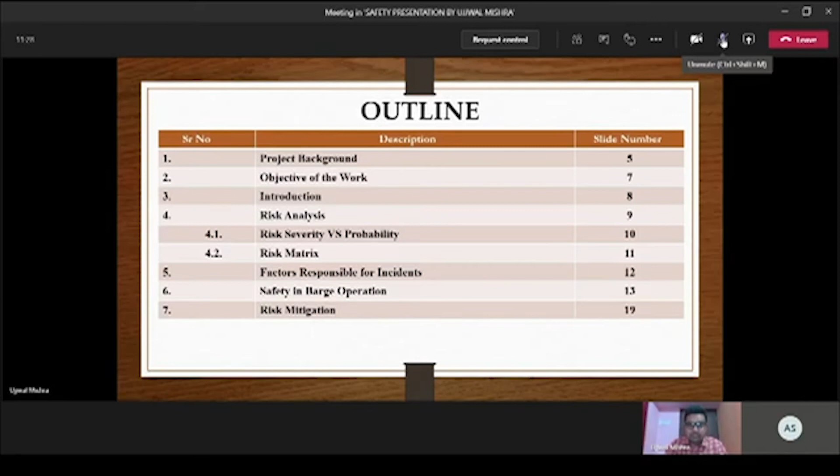Many of us have confusion regarding what is a port and what is a harbor. I have drawn a basic difference here. As you can see in the presentation, there are various comparison metrics that I have taken, and I have compared port and harbor so that it becomes easy for a normal person or the public to understand the differences.

If you take the meaning, port refers to an arrangement where boats and ships moor and transfer passengers and cargo to and from land. But harbor alludes to an area next to the shore where watercrafts are anchored to get safety from stormy weather. So what is it exactly? Port is a place for docking, traffic and storage of boats. Harbor is a place for storing boats.

When we come to the construction part, ports are always man-made, but harbor can be a man-made structure or a natural harbor. Ports are used for trading of goods and cargoes between countries. Harbor is used for seeking shelter from bad weather, and for vessels to be safely stored. Onshore facilities are available in port construction, but in harbor it may or may not be available.

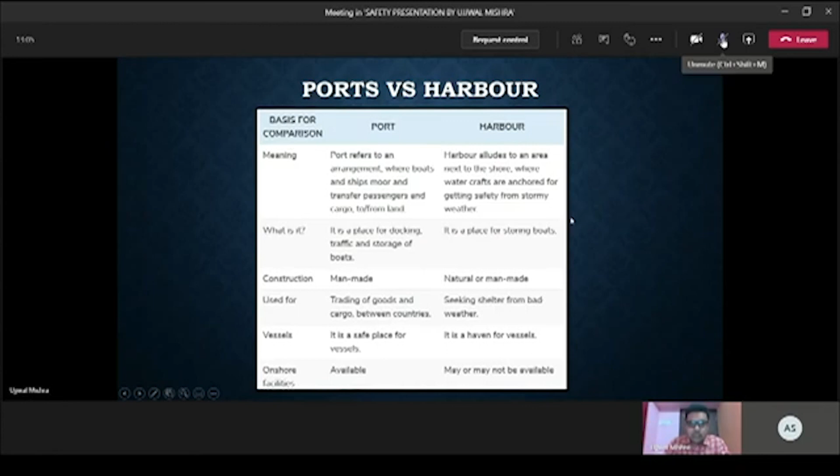Moving on with the presentation, we'll start with the project background. The case study that I've taken is from a port construction site. Port construction basically includes the following things to be done: sand filling on water, piling activities, superstructure work and revetment works.

What is sand filling on water? This is basically done to prepare the working platform so that most of the works can be done in a land mode of construction, and it becomes easy to construct anything on land as compared to water. Piling activities you might have read or heard about, and superstructure work also you might have read or heard about.

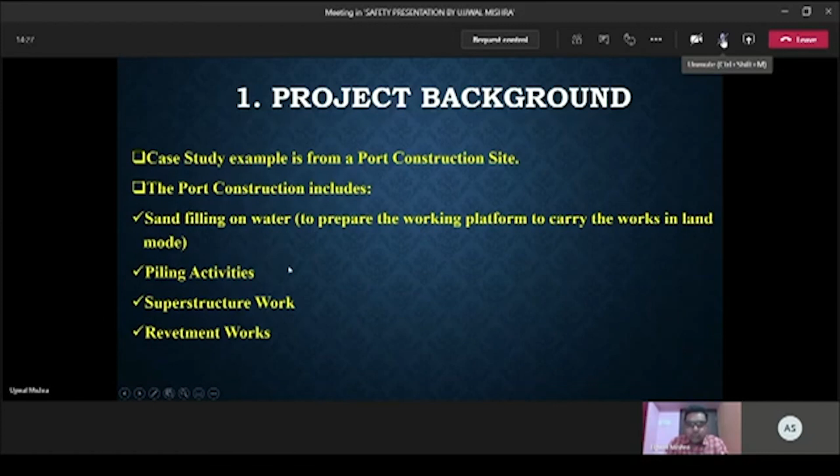So what is a revetment work? This is something which is not very common. This is a basic cross section of a revetment work. This particular structure, as you can see here, is a revetment. So what is basically a revetment? This is a sloping structure, as you can see here. This will protect your shore side, that is the land side, from crashing waves - these are the waves, and this is the water side or the sea side. So this particular sloping structure will protect the land from scouring and erosions.

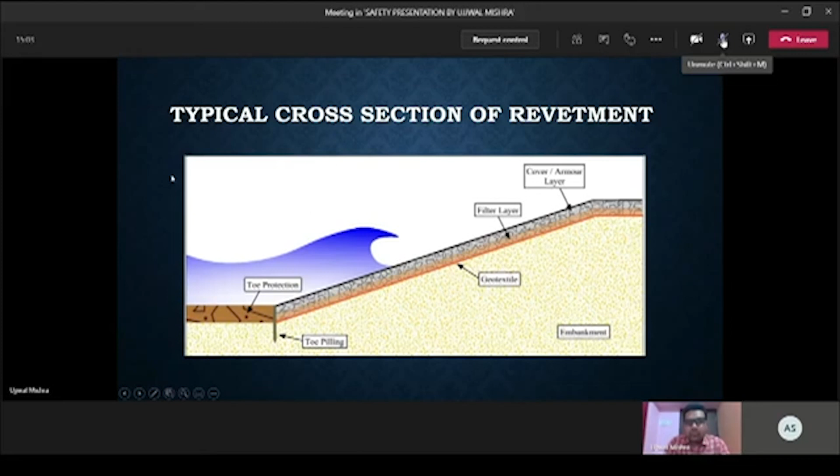So what is the main objective of the work? It is to understand and categorize different incidents occurring in ports and harbor construction, to understand safety requirements in barge operations, and to understand the mitigation strategies for different activities carried out in ports and harbor construction.

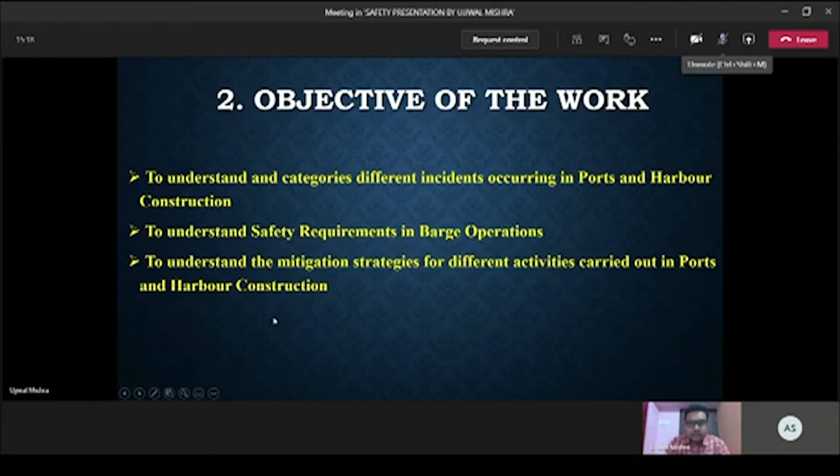Starting with the introduction part. In any project, what is initially done is incidents are classified into various categories. For this example, I've classified them into 8 categories. These are nothing new, you might have already read about them — it's only the difference in how you number or name the categories. For this example, I have given category 1 to category 8.

Category 1 is number of fatalities. Category 2 is number of reportable lost time injuries, which is non-fatal. Category 3 is dangerous occurrences. Category 4 is reportable sick cases. Category 5 is major environmental incidents. Category 6 is first aid cases. Category 7 is near miss cases. Category 8 is minor environmental incidents. These may vary from project to project.

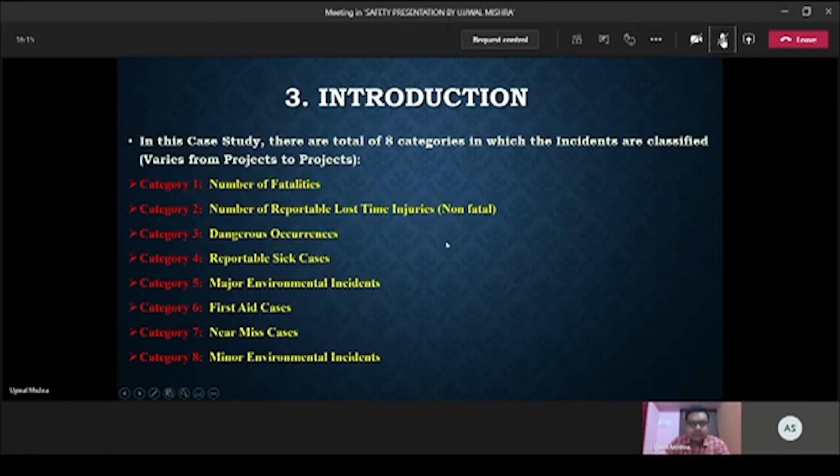Now coming on to risk analysis of various activities in a ports and harbor project. Before starting any work, all the activities are listed out and potential hazards for that particular activity are prepared. Their impacts and mitigation strategies have to be prepared before that particular work has started. So what are the activities in a port and harbor construction that need special emphasis for risk and its mitigation?

These activities are working at height, vehicles, tools, plant and equipment, excavation works, temporary works and formworks, cranes and lifting, piling activities, hot work and fire, working in confined space, working in and around underground and overhead services, working over or adjacent to water, and climate and environment.

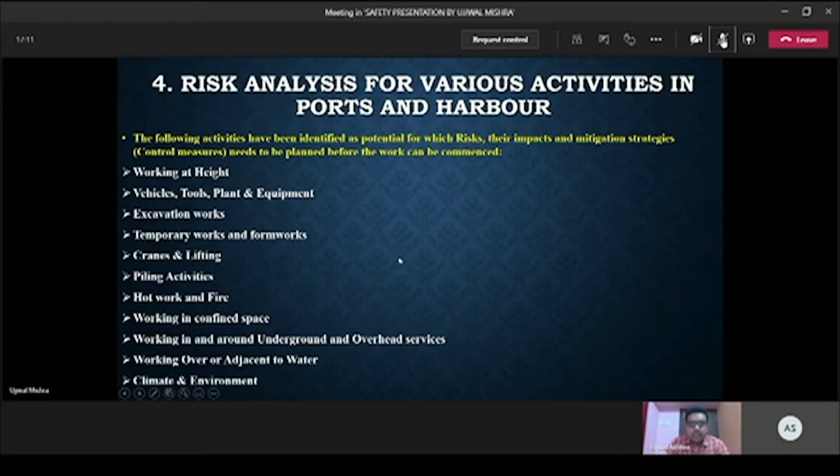Now this particular risk analysis will be divided into 2 parts: one is severity and the other is probability. Severity is how intensive that particular kind of risk is — it signifies the intensity of the risk. Probability, as you might have already heard, signifies the chances of occurrence of that particular kind of risk.

What we have done here is analyze a particular kind of activity on a probability and severity scale, from 1 to 4. 4 is the maximum value, and if a particular activity has a maximum value of 4 in both severity and probability, this means the impact is very likely to happen and it is very severe. The probability says the event is almost certain to occur and has occurred repeatedly. So this activity will be given a value of 4, and best safety practices will have to be followed for activities having value 4.

Similarly, we have value 3, which is likely to happen. Value 2 gives unlikely possibility, and value 1 says very unlikely. I'll also show how this particular kind of table is used in subsequent slides.

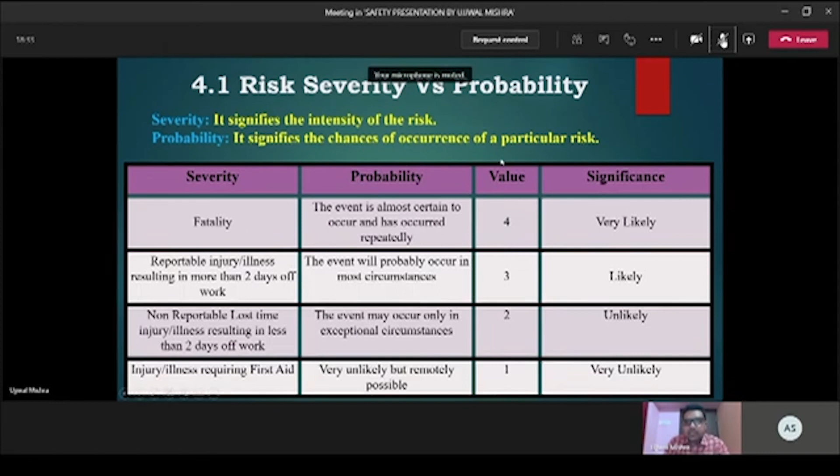Another important thing we have is a risk matrix. As you can see, this is a particular matrix with severity values on the x-axis and probability values on the y-axis. Maximum value is 4, minimum is 1. This is a table that has been generated, and these numbers inside are the multiple of these two values.

For example, this one is a multiple of 1 into 1. This 4 is a multiple of 2 into 2. This 6 is a multiple of 2 into 3. Similarly, 12 is a multiple of 4 into 3.

So why are there different colors given here? For any activity, these matrices are prepared and colors are assigned, making it easy for any viewer to understand that the numbers in green have very low risk — minimum safety standards are enough to mitigate the risk for these activities. The orange color says the activity has medium risk. The red color says the activity has very high risk, so best safety practices have to be followed for activities with red color or high risk factor.

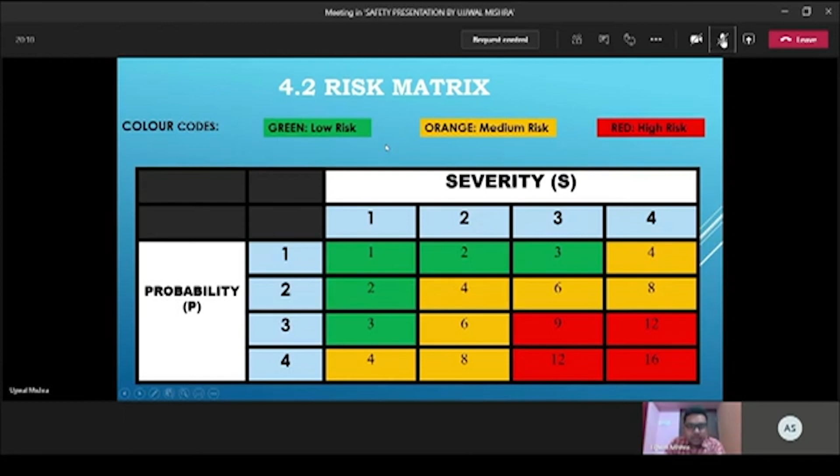Okay, so what are the factors responsible for incidents? We have basically classified three important factors such as human factors, physical factors, and management factors as the most important factors responsible for any incidents to occur on any site.

So what are human factors? Human factors are basically subdivided into a few other parts, which includes poor task behavior and using shortcuts, unsafe behavior of the worker, standing and operating in an unsafe position. So these are things that are not properly done by the worker working on a site.

Physical conditions belong to the site conditions, which include unsafe operations, hazards originated due to external site factors, and unsuitable work area. It may or may not belong to a human error, but mostly it belongs to physical conditions of the site.

Third, we have management systems. This belongs to the superior, the project managers, or the management working in that particular project. So what is the subdivision? It is unsafe work methodology or not specific to task - that is, they follow some generic work methods. Not enough trainings conducted and instructions given. Lack of proper supervision on site. So these are the things that lead to incidents in most site situations.

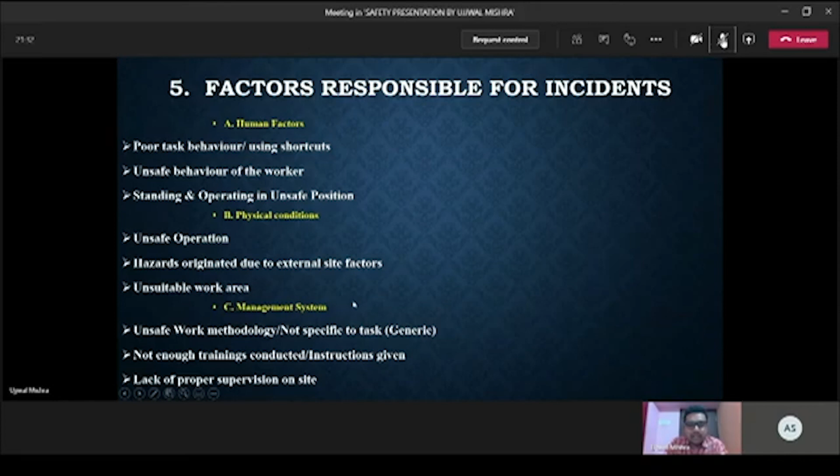Since this is talking about ports and harbor work, one of the most important things we have in any port or harbor construction is a barge. So what is basically a barge? As you can see in this picture, this is a barge, and this is a crane which is mounted on a barge. All the activities that need to be done on the sea part or water area have to be done using this, because you cannot do all the work on land. So this is the arrangement used for working on water.

So what are the safety things that we have to follow here? Barges are operated by trained and authorized persons only. PPEs, that is personal protective equipment like life jacket with reflective tape, safety shoes and safety helmet, shall be worn by all people working on the barge.

Barges are fitted with top rail, mid rail and mesh net. I'll show you in the picture - the mesh and rails are provided here, as you can see on all the edges. This is the top rail, this is the mid rail, and this is the bottom rail, or toe board as it's called. This will prevent any person from falling.

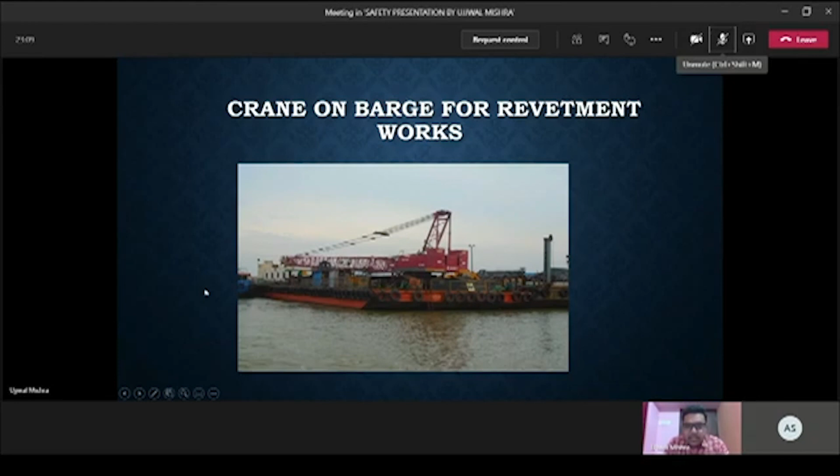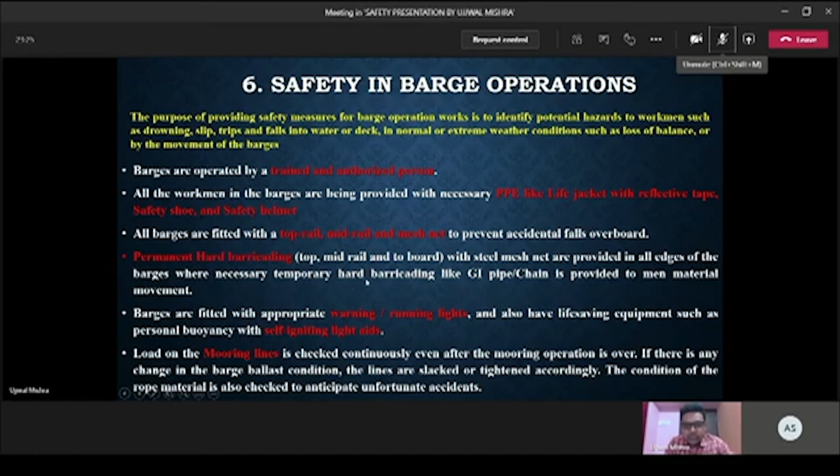Permanent hard barricading shall be provided. Warning lights and running lights should be provided. Self-igniting light aids shall be provided, and mooring lines shall be checked all the time for the operations. I'll show you what mooring lines and other things are here.

In this picture, this is a barge and how the safety setup is provided in this particular barge. As you saw about rails - top rail, mid rail and bottom rail - there is also a door access, steel mesh provided, and life buoys with self-igniting lights are also provided. These you can see here.

This is a mooring arrangement. This will help to anchor that particular barge at a place where some kind of activity is going on.

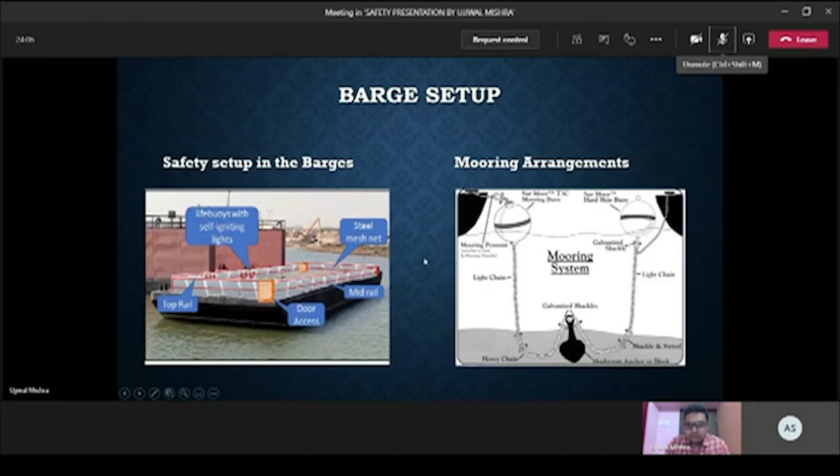Continuing now, access and egress must be adequately illuminated. In this picture you can see this is the access and egress on the barge. It has to be secured properly using structural steel material.

Rescue teams shall be readily available at all times to deal with emergency situations. Passenger vessel barges under 60 meters in length shall carry not less than 6 life buoys. Warning signs and notices shall be displayed.

All bollard ropes are to be secured properly to avoid falling into the sea. So what is a bollard rope? This is a bollard arrangement, as you can see. It has to be tied in a particular pattern so that anchoring can be done properly.

Structural materials, supports, winches or cranes shall be in good condition and fully secure over the barge. As you can see in this picture, we have a crane mounted on a barge and how it is secured properly using structural steel material.

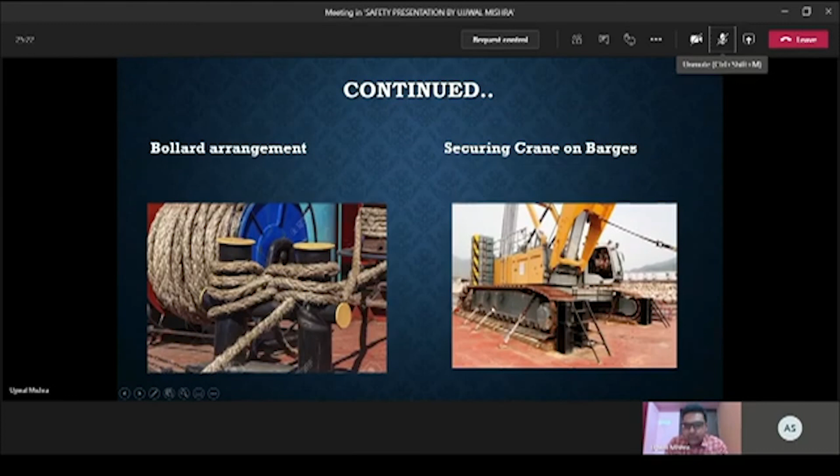Crane swing area should be marked and warning signs shall be placed. No lifting shall be carried out in heavy winds above 30 miles per hour. So these are some of the important things that have to be taken care of.

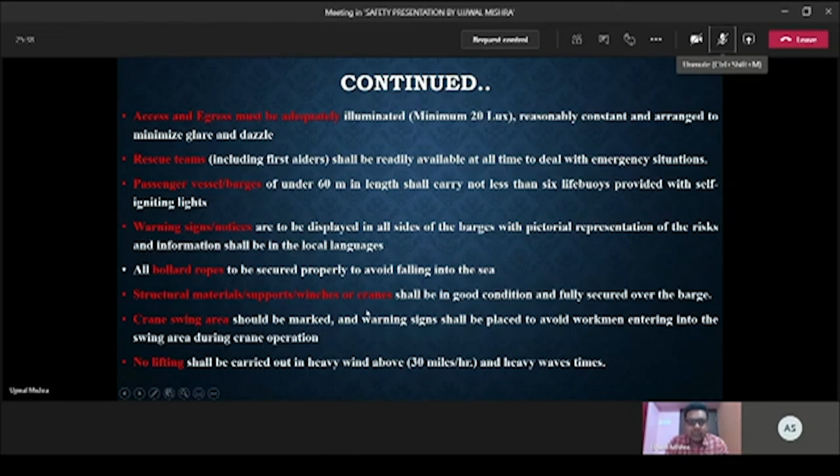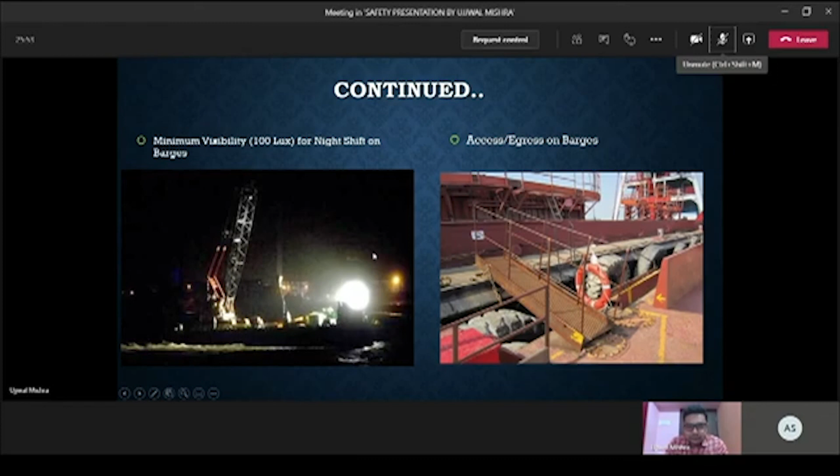Now moving on with the mitigation strategies. What are mitigation strategies basically? They are the control measures established for each and every activity that is going to be conducted. Why do we have to do this? So that the worker working on that particular activity knows the probability and severity of that risk, and what safety practices he has to follow for that kind of risk.

As we saw various activities initially, we'll take a few examples and show you how assessment is done. So the first activity is working at height.

What is the hazard here? The hazard is unprotected leading edges and impact of falling objects, causing damage and production loss. What is the risk involved? The risk could be as severe as fatality or serious injuries due to falls and impact of falling objects.

So who are the people at potential risk? These are general site workers, general site staff, or site visitors. Anybody could be at risk.

Now how do we assess this activity? As I told you about probability and severity, and the risk matrix which provides the number for that kind of risk, this activity has been rated as a maximum of 4 for the probability factor and a maximum of 4 for the severity factor. So the index becomes 16. As you remember the colors, number 16 is the maximum from the risk matrix table, meaning the best safety practices have to be followed, or else any misstep could lead to fatality or serious injuries.

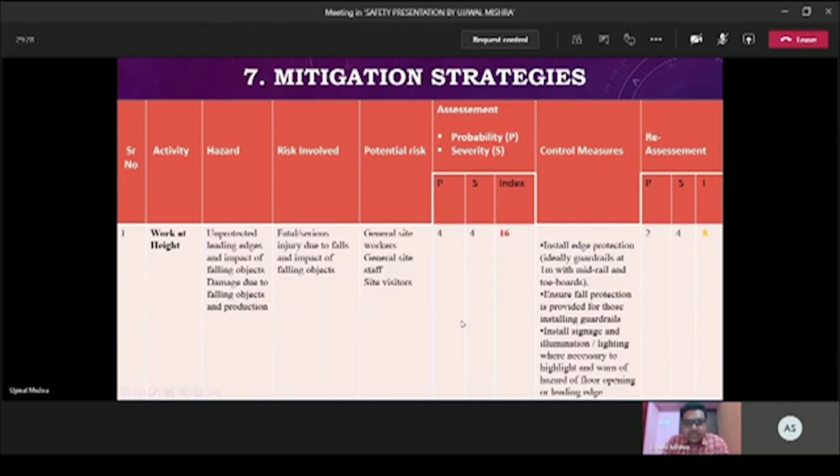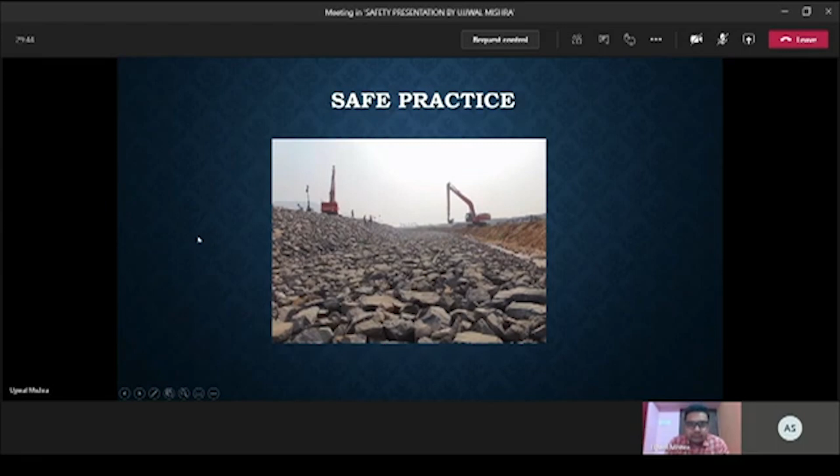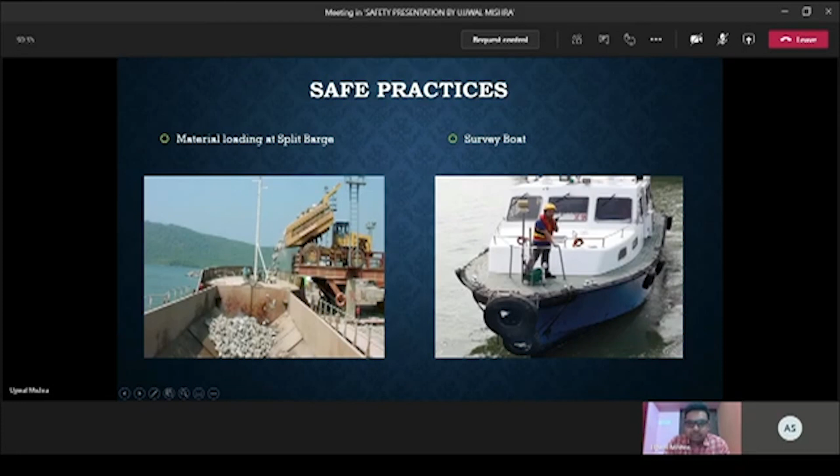Next activity we have is excavation. Here also hazards, risks and potential risk factors are established, probabilities and severities are given, and control measures are established. So what are the control measures? Excavation shall include the method of shoring for supporting the excavation. All excavation shall be inspected by a competent person before the start of the day's work.

So you can see if these control measures are established, the risk index can be brought from 16 to a 4 value. So when the value is 16, best safety practices have to be established, but with a value of 4, minimum safety standards are enough to complete that particular kind of work.

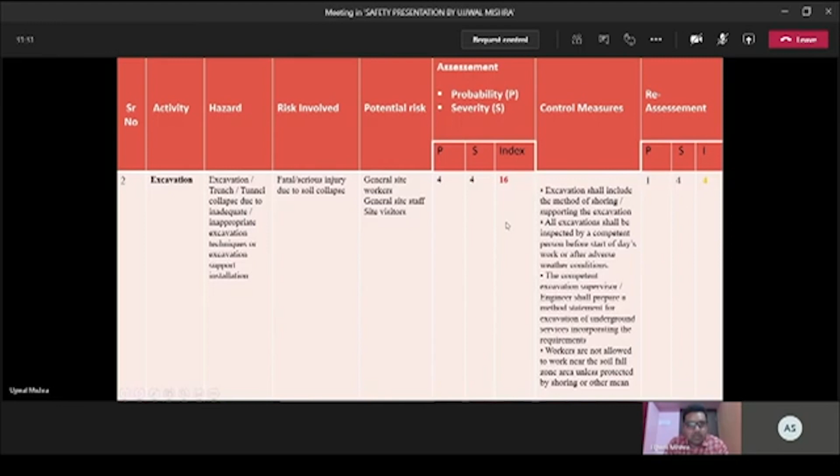Now we have another activity which is working over or adjacent to water. This is one of the most important things in any port and harbor construction, because this is done for over 50% of the project work. So what is the hazard? Hazard is fall of person into water. Risk is risk of drowning.

Potential risk - everybody who's working in that particular area is potential risk. So what is the severity and probability? The index value here is 12. This means this is a red value. So best safety practices have to be established for this particular kind of work.

So what are the control measures to bring this particular index to below 12? One is edge protection, as you saw in the barge operations. Safety harness should be worn and secured in the lifeline. Suitable lighting shall be provided. Rescue boat shall be made available. Life jacket shall be provided. Activities at edges shall not be performed in rough wind times or dark hours. Caution boards must have proper information and boat points shall be properly secured.

So if these measures are followed, the reassessment value for that particular risk will give 3, which is in green color. This means minimum safety standards are enough to perform this kind of activity which is near water.

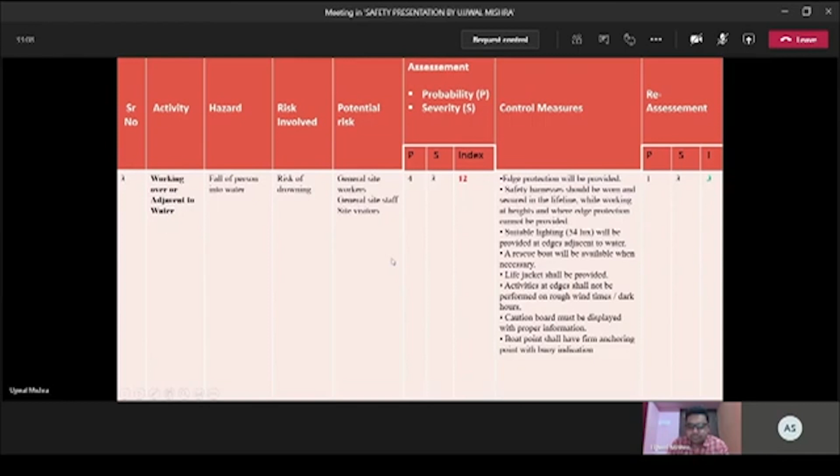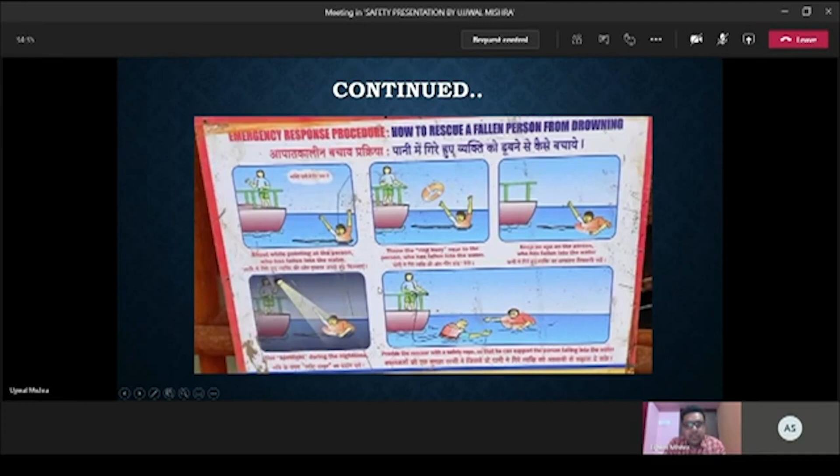So that's it from the presentation. I hope you are able to understand why safety plays an important role in any construction project. So from the presentation, I would like to summarize a few key points which are most important, and I would also request everyone to remember those things.

Number one, the difference between port and harbor. Number two, how to make a risk matrix. Number three, what are the safety precautions that need to be followed in a barge operation? And the last and most important one, how to prepare a mitigation strategy for any kind of activity. So thank you and happy learning.